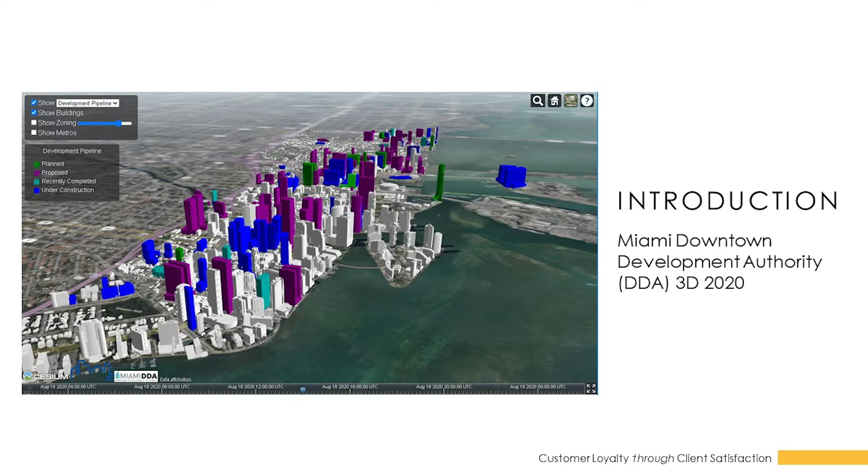And of course, this is only the city of Miami. This excludes Miami Beach, the island to the east, which is about 13 miles of beach, extending from South Beach all the way up to Sunny Isles, which is the northernmost part of the county, and then further north to Fort Lauderdale and its beaches. So there's definitely a trend where construction in certain areas is going up vertically, not to mention just the amount of it as well.

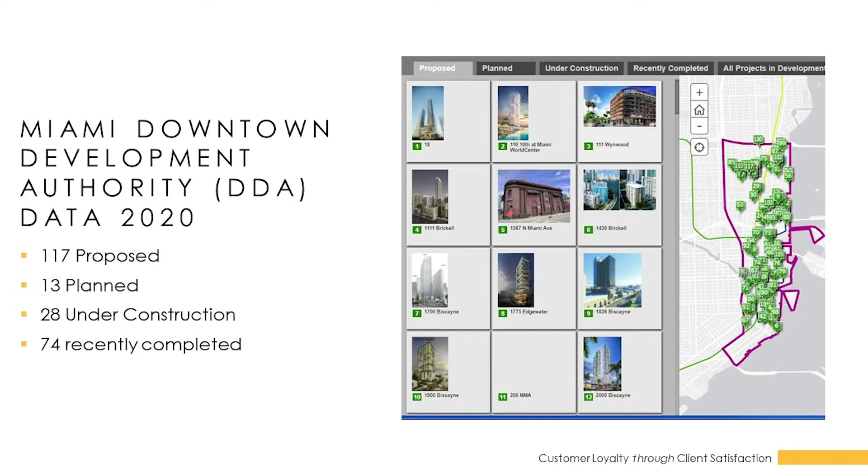So for the most part, when we do a quote unquote high-rise, we follow a general workflow. We start with some preliminary work. Then we follow it up with some control work, horizontal and vertical. Then we can get into actual construction and construction layout tasks. And then we finalize the project depending on what the closeout document requirements are in the contract between the general contractor and its owner.

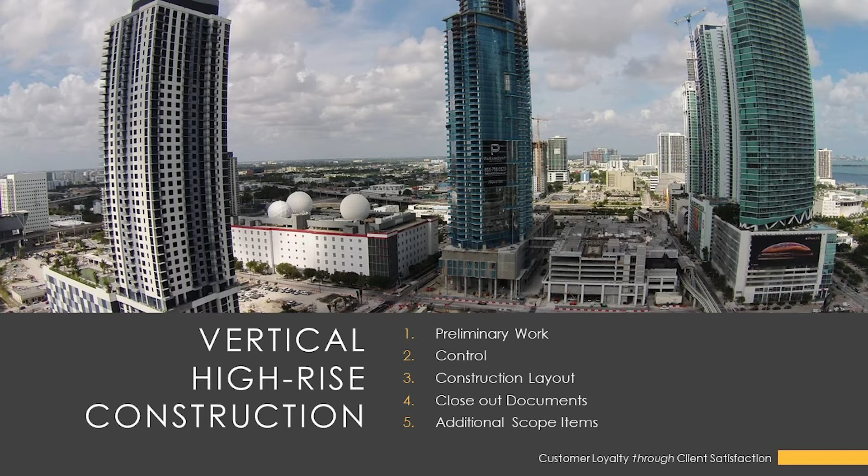And then additional scopes are anything that's not originally scoped that, as we're going through the project or trying to close it out, they realize they have to do to close out their permits. So we start with number one being the preliminary work. It really entails doing what we call a property boundary analysis and the plans analysis.

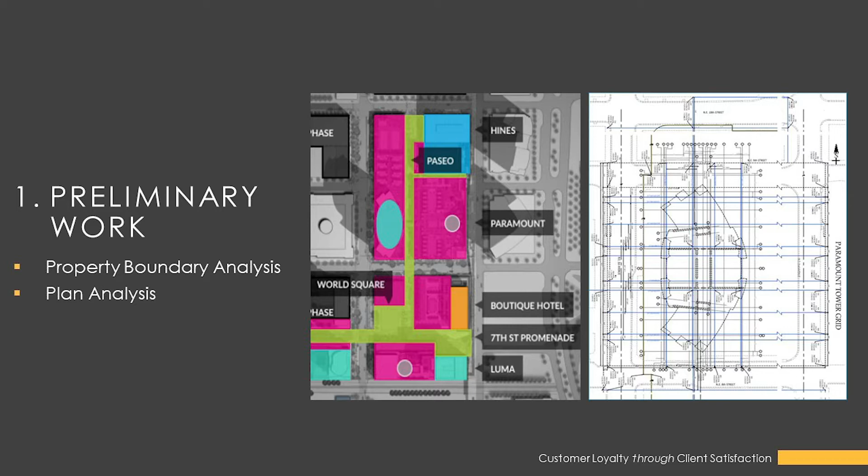So what is the property boundary analysis? The goal here is to reestablish the boundary so that we can relate the existing boundary, which will not change throughout the project, with the building and any other proposed improvements that pertain to the building. In this phase, it's just like the regular surveying of a boundary. You run your traverse and you locate property corners. Redundant measurements are critical because this is your survey control, much like any other boundary survey, except you have the intent of aiding in the construction process as it goes into the next phase.

Once we have a good boundary, placing the building and verifying the setbacks is probably the next key step. In this particular example, this is a downtown project. It was not a big building, but the concern here is that it is in the downtown area. So there are buildings right adjacent to the property lines, which always makes it difficult to bring control up, and it makes it a tighter spot to work in.

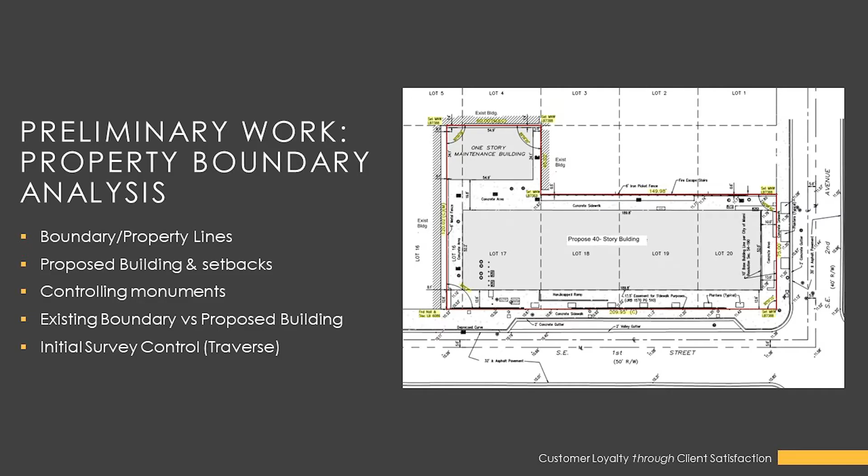The plan analysis portion of it is basically where we compare, obviously, for our survey layout that we need to do from the contract with our client. We compare all the architectural, all the structural, all the civil plans to make sure that there's no conflicting information from one sheet to the other that affects our survey layout and scope that we are working primarily with. Obviously, any discrepancy that affects our layout is communicated immediately with the client.

At this point, it's more likely that we're going to write one or two RFIs to the client, RFI being a request for more information or some sort of clarification, if you have a question on the plan or you just don't seem to find a dimension to get a specific size and location for something that you are involved in from a survey perspective.

At this point also, it's the time where you should involve, we normally have an assistant PM, a surveyor, to aid in the quality control. It's important that I don't just start putting out RFIs for questions that aren't necessarily needed or it's in another sheet. So having that second person review your information can sometimes avoid having to send a client a question when it's on a separate sheet or on a detail.

I'm going to be talking about control now. Control is the most important thing in the job site because everything that gets built and installed will be based on the control. The control consists of a network of permanent points physically set and identified around the project site. Depending on the surface material or the conditions, we'll choose a magnetic nail, a pin, a hub, a scribe, or any other mark that we have available. These points are assigned coordinates and elevations.

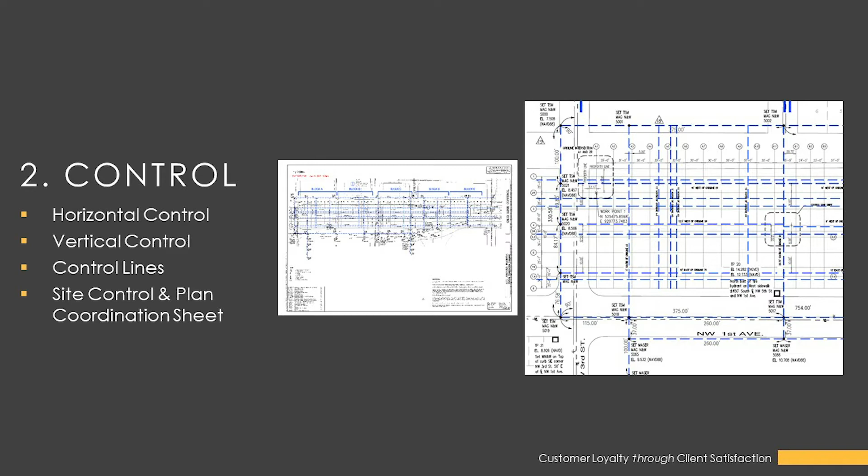A traverse. Everything starts with a traverse. Once we choose the location of the points, using our high precision equipment, we will measure redundant angles and distances through them. A traverse is typically an irregular closed geometric figure defined by physical marks at every angle, as shown here in the sketch. Setting control is typically done during our first field visit. Everything gets located from this control, including the property corners.

Marks are often disturbed or destroyed due to heavy machinery and construction traffic. Their view can be obstructed by parked equipment or materials being stored in between them. So we have to constantly be recovering points, and the reference marks are really, really good help for that. Next slide.

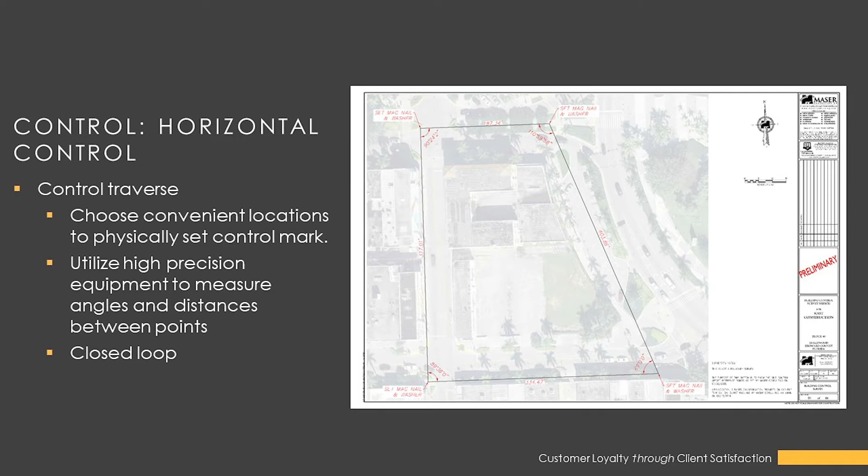Once we run the traverse, we have assigned horizontal coordinates. Now this is a stage where vertical control is run. Elevations are run, and these points are assigned elevations. So typically what we do is we research vertical reference marks on the public online databases such as NGS. In the case of the area here, Miami-Dade County has a database online. City of Miami has maps, and City of Miami Beach has maps as well. So we'll be able to find the nearby benchmarks.

Typically, we choose two of them. We start our measurements at one benchmark. We run through the site, setting benchmarks around the site, and then we close on a second benchmark.

The datum that we choose depends on the plans. So most commonly used in South Florida are NAVD 88, NGVD 29, City of Miami, and City of Miami Beach datums. The elevations are published on our control marks and survey sheets.

Some of the survey sketches required by the municipality are required in a specific datum. So when we choose the datum based on plans, we'll have those elevations posted on the control points, and when we submit these surveys to the city, then we'll have to convert the values to show what they want to see on their survey sketches.

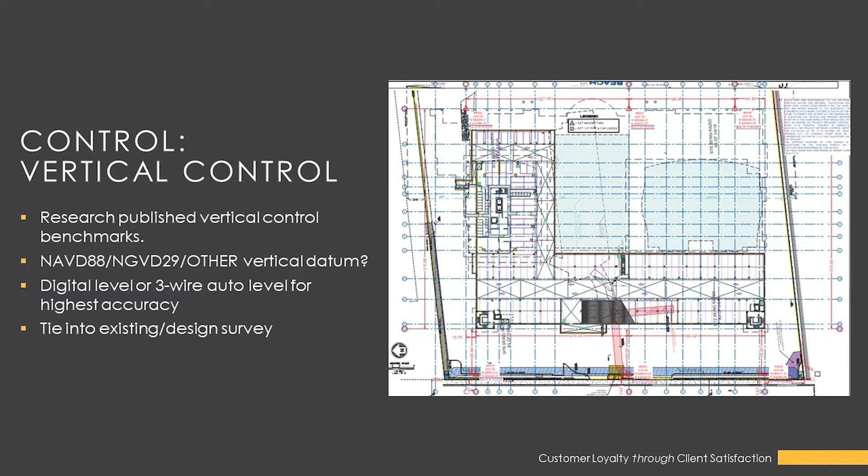The offset distance from the grid line is chosen based on the ability to physically mark the lines with minimal obstructions on the slabs. Obstructions can present themselves as structural elements such as walls, columns, elevator shafts, and we need to minimize the obstructions so the contractor can mark a line across a hallway, for instance, with minimal chances of running into a column or wall.

The control sheet shows control points, control traverse angles and distances, horizontal coordinates with elevations, the descriptions on the marks, whether it's a mag nail washer, whether it's a scribe mark, a pin. Typically, we prefer to set mag nail washers on concrete.

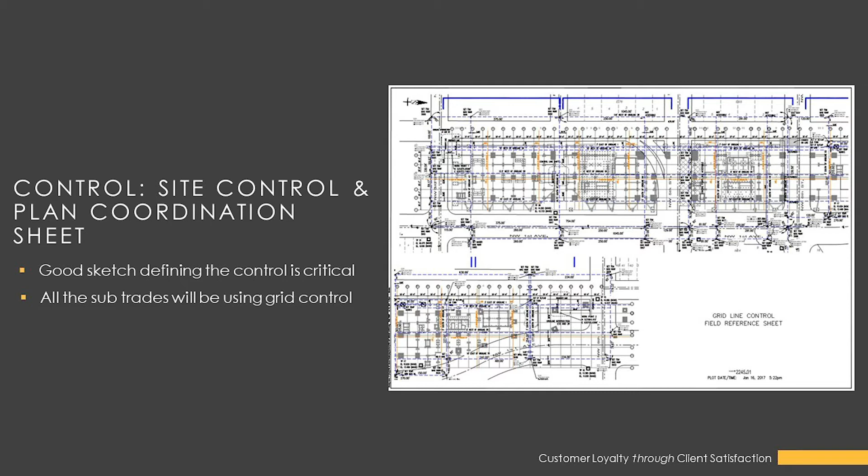The contractor will want the building corners marked, usually. They will typically request setting marks along the boundary lines for the purpose of installing silt fences, construction fences, clearing vegetation, or simply for visual aid. We'll also review utility plans and mark their center lines for trenching. Typically, a water main, sanitary sewer, storm drainage, and FPL are the most common requests.

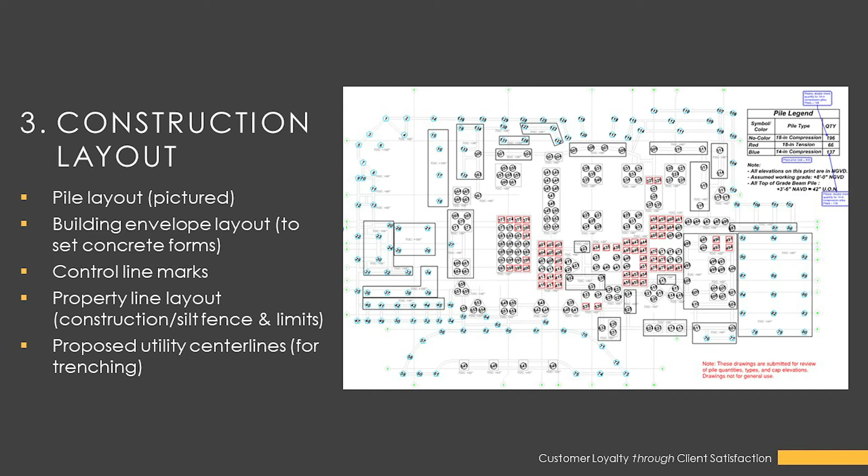We'll typically be requested to capture the location and the elevations of these FPL conduits and storm pipes and structures for the purpose of preparing as-built survey sketches for record later. Slide 15. Next slide.

Marks get run over by construction equipment all the time, vehicles and workers. It happens often where marks are destroyed and they need to be recovered. So offsets help a lot. Next slide.

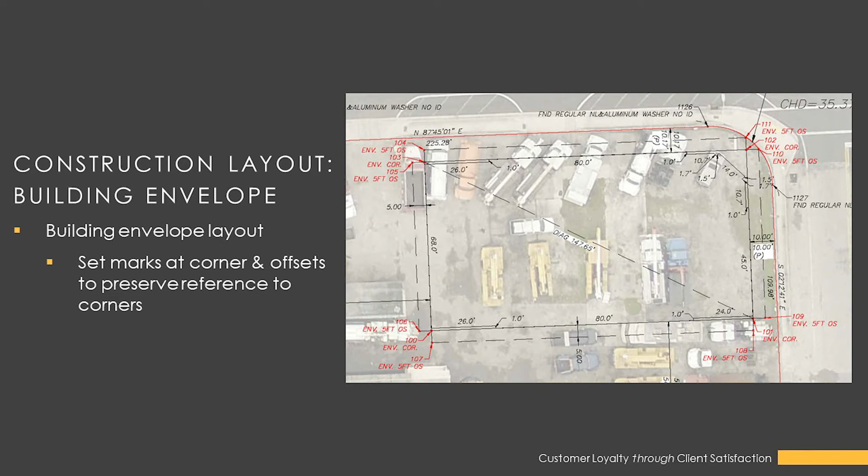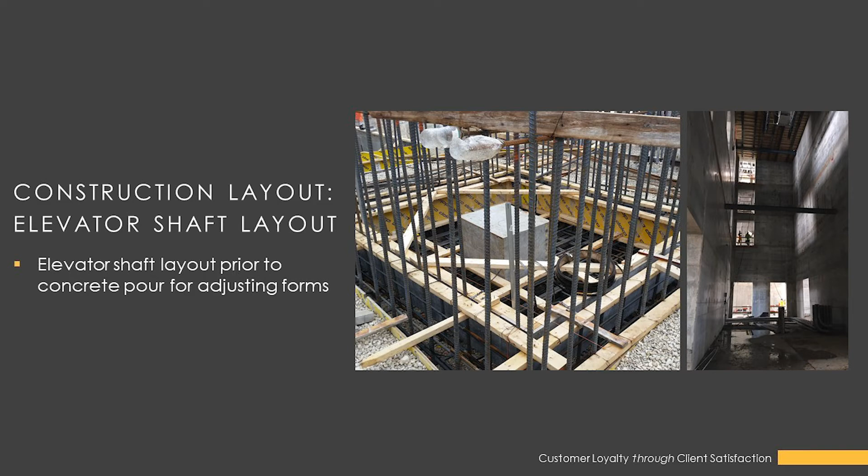Closeout documents. Closeout documents are typically requested during later stages and the end of construction. Submission of all signed and sealed surveys is required. Samples of documents that are part of the closeout documents are pile as-built sketches showing the deviations of every pile that was installed, and drainage well as-builts showing the latitude, longitude, and elevation of the installed well structure.

Public Works will require a final as-built survey showing all finished improvements, elevations on the sidewalks, new utilities, and the building itself. FPL easement documents: like I said before, we'll as-built the conduit that was installed. We'll capture the horizontal location and the elevation, and then we'll publish it and draft an easement, a legal document giving access to the power company to maintain their equipment if anything shall be maintained or replaced.

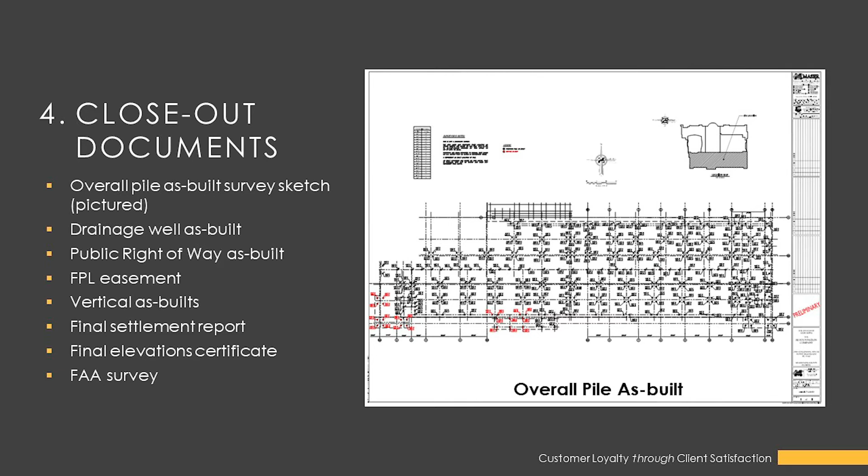As-built surveys on slabs showing finished elevations on the slabs are also part of the closeout documents. Final settlement report showing the final building settlement. The Federal Aviation Administration survey showing the building height is also part of closeout documents, and there's a couple more. But these are just the most typical examples of closeout documents. Next slide, please.

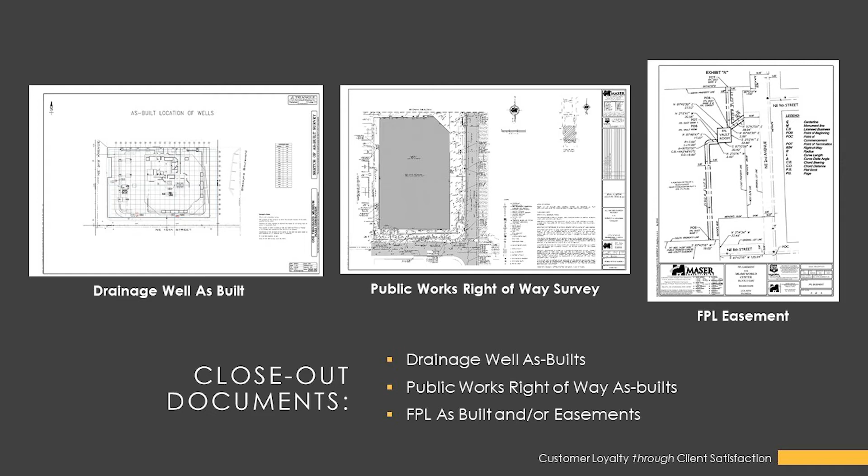In the case of post-tensioned slabs that have tensioning cables, we typically do three of these: one before they pour the concrete, one time after they pour, and a third time after they tension the cables. Elevations change because of the stressing. So we submit the documents to the engineer, and they analyze the data.

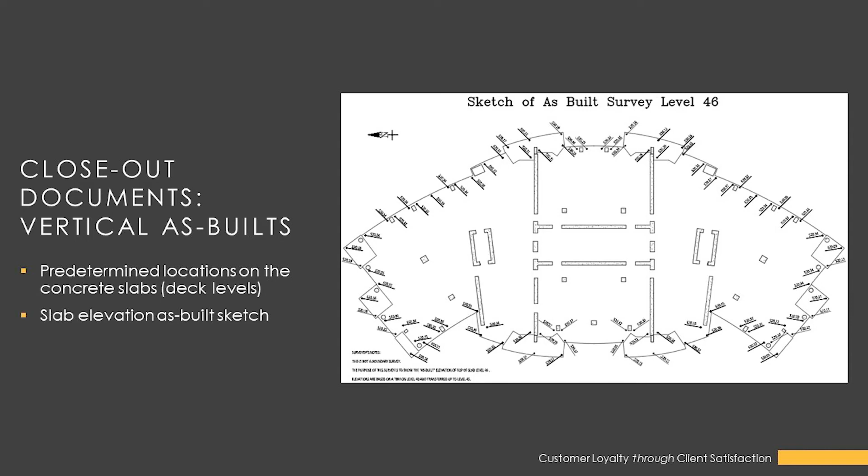Sketches are typically produced within one working day of the field survey for the engineer to review the data. Everything in construction is required yesterday, so we try to do this as fast as possible, quick turnarounds. Next slide, please.

The bottom one is the layout for the marks, and the top is a report measured on different dates. This, I think, took about 1.5 years, and the building, I think, settled a few inches. So we'll continue measuring these pins as the building gets to the higher levels. Usually we propose every 5 levels, and another time when the building reaches the top, after the top out. Next slide, please.

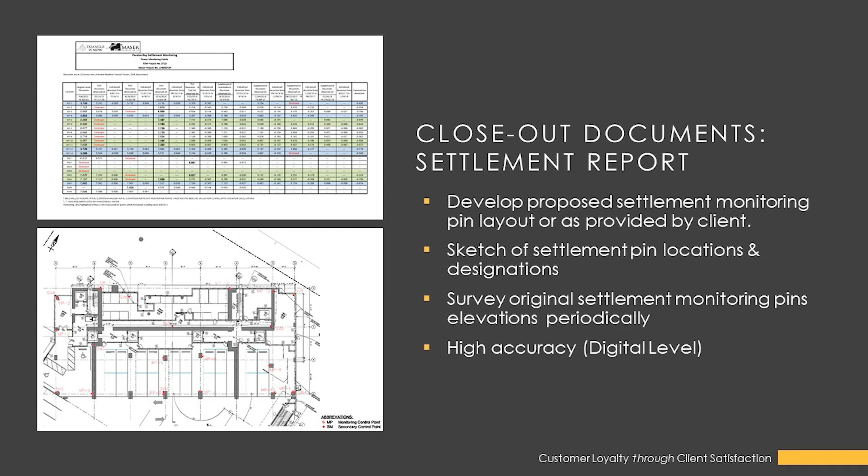This survey is required to show the pre-construction and post-construction building heights. Obviously, when they propose the height, settlement may not go as predicted, and it may settle more. So the heights are going to be different pre-construction and post-construction. In this case, the sketch shows 1000 Museum. The highest point was a helipad on the roof, and we were required to publish the latitude and longitude of the corners of the helipad and the elevation on the helipad.

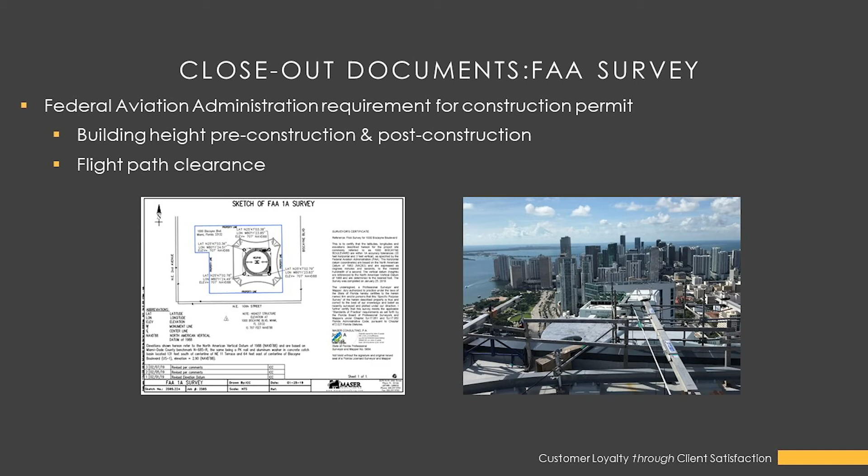Which brings us up to the additional scope items. We have a little package that we prepared on a typical construction site, but obviously every construction of a high rise is not going to be the same. The conditions aren't going to be the same. So there's always going to be additional scope items, and depending on the contractor and their obligations to the owner and their contract, they may need additional items.

But a couple of additional scope items that we haven't talked about, but I wanted to mention: the elevator shaft as-built is critical, obviously, to any high rise. There's a picture Michael had shown earlier of an elevator shaft layout, and what looks to be like a giant elevator shaft.

That's one of our buildings we worked on at 1000 Museum. I think there was a total of 8 cars in that building alone, in that elevator shaft. So the elevator shaft is critical not only to the function of the building itself when it's completed, but when it's just a structure itself, a concrete structure, it needs to be plumbed with minimal errors in the concrete for the installation of the mechanical equipment and the cars themselves.

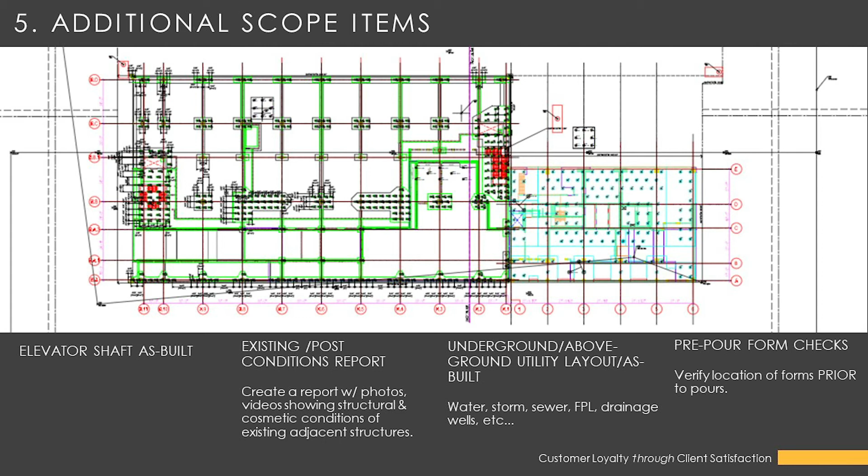To kind of wrap things up here, obviously I've mentioned each building is different. Each building has the architect's stamp, so it's uniquely different. The property is different. The location is different. So it presents obviously unique opportunities for us to come up with new strategies to be efficient and expedite some of the work for the general contractor, our client. And of course, Maser tailors every service that it has depending on the client needs, and those client needs are obviously dependent on the owner's needs.

A little bit of the actual process: communication is always key, not only within our technicians, from the project manager to the assistant project managers to the field crews, but also to the client, their PM and their superintendent and their assistant superintendent, so that we are kind of seamless in the background, but working on their schedule, so as to not hinder that schedule. Usually these schedules for construction are pretty tight, and obviously there's lots of money involved, so they want to build it as fast as possible, as safely as possible.

Maser has been doing this kind of high-rise construction surveying for the last 20 years from the team built by Mr. John Liptak and Jeffrey Tuckban. So they have personally been shaping the skyline in South Florida for the last 20 years and continue to do so, and hopefully for 20 more years with some of the newer staff that they have taken on to train and help continue the reputation that we've built down in South Florida.